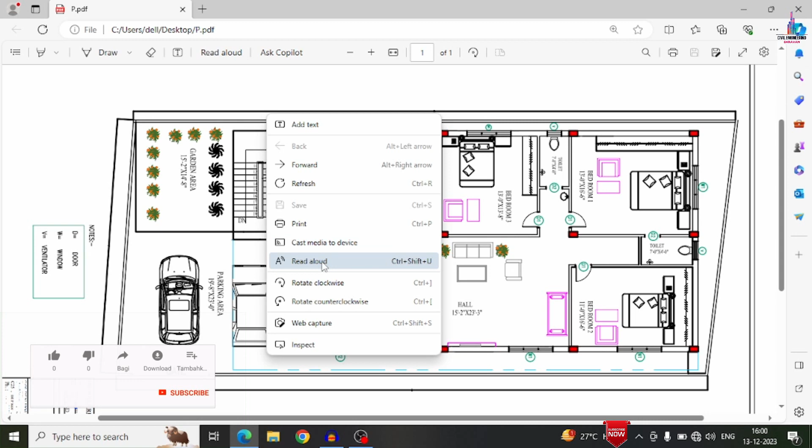This plan consists of the entrance from the north facing direction. In the north facing direction, there is a 15 feet common passage, which is nothing but the road. This is the east facing house plan. In the entrance section, there is a parking area with horizontal dimensions of 19 feet 8 inches and vertical distance of 23 feet 0 inches.

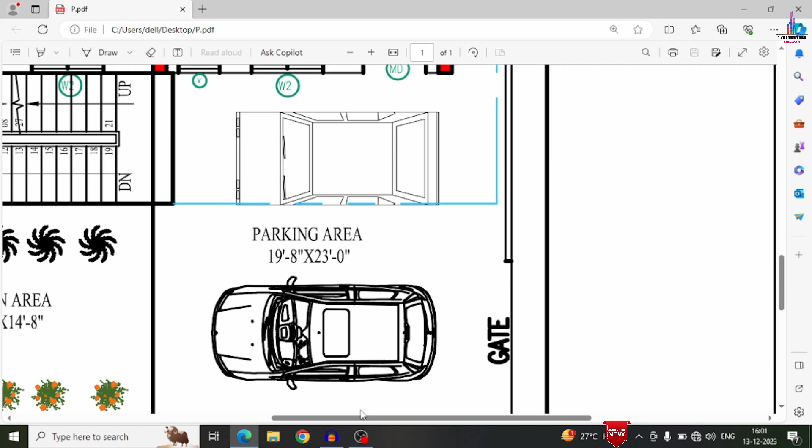Through this parking section, there is a garden area consisting of 15 feet 2 inches in horizontal direction and 14 feet 8 inches in vertical direction. This is the main guest room, placed in the east facing direction. This is the main door, through which we are entering into the guest room house.

This is the guest room dimensions. It consists of 11 feet 0 inches in horizontal facing direction and 14 feet 0 inches in vertical facing direction. Through the guest room section, we are entering here into the hall section.

This is the hall section. This is the puja section, which has horizontal dimensions of 4 feet 0 inches and vertical dimensions of 5 feet 0 inches.

This is the open kitchen area, which has approximate horizontal dimensions of 11 feet 3 inches and vertical dimensions of 9 feet 0 inches.

And this is the utility area, generally used for washing purposes. It consists of horizontal dimensions of 4 feet 0 inches and vertical dimensions of 9 feet 0 inches. So this is the utility area.

Now this is the dining area, which consists of 14 feet 0 inches in horizontal dimensions and 10 feet 7 inches in vertical direction distance.

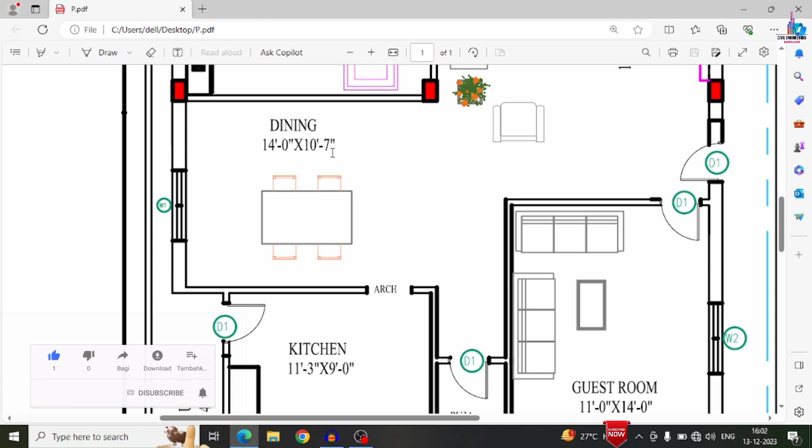Again, this is the hall, which consists of approximately 15 feet 2 inches horizontal dimensions and 23 feet 3 inches in vertical dimensions.

In the same process, there is the third bedroom, which has dimensions of 13 feet 0 inches in the horizontal direction and 13 feet 8 inches in vertical direction.

So this is the cupboard section, which is attached with one wash section, consisting of horizontal dimensions of 7 feet 0 inches and vertical dimensions of 4 feet 0 inches.

This is the master bedroom, which is nothing but bedroom number 1, consisting of higher dimensions compared to the other bedrooms, having horizontal dimensions of 13 feet 0 inches and vertical dimensions of 16 feet 6 inches. This is the door which is placed here.

It also consists of one attached washroom, which has horizontal dimensions of 4 feet 0 inches and vertical dimensions of 7 feet 0 inches.

And this is the secondary bedroom, which is nothing but the children's bedroom, having horizontal dimensions of approximately 11 feet 0 inches and vertical dimensions of approximately 16 feet 6 inches.

So this is the 3BHK plan, which is in the east facing direction. The staircases are provided in the east facing direction.

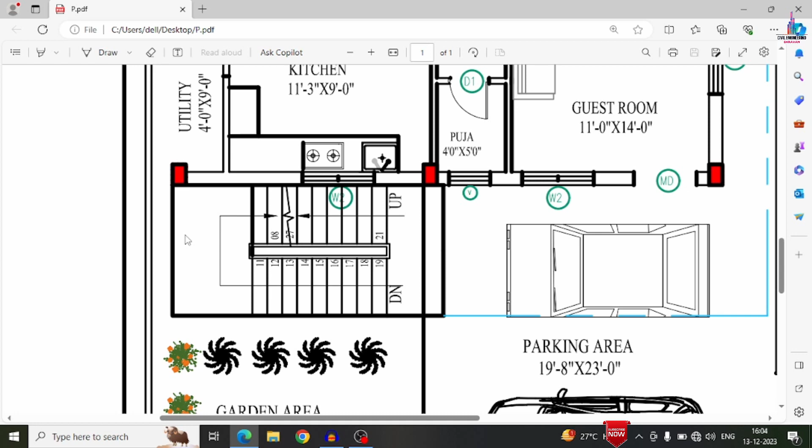For this plan, there are approximately 1, 2, 3, 4, 5, 6, 7, 8, 9, 10, 11, 12 columns that will exist here.

And for this plan, there are doors: MD is the main door, this is D2, this is the third door, this is the fourth door, this is the fifth door, this is the sixth door, and this is the seventh door, and this is the eighth door.

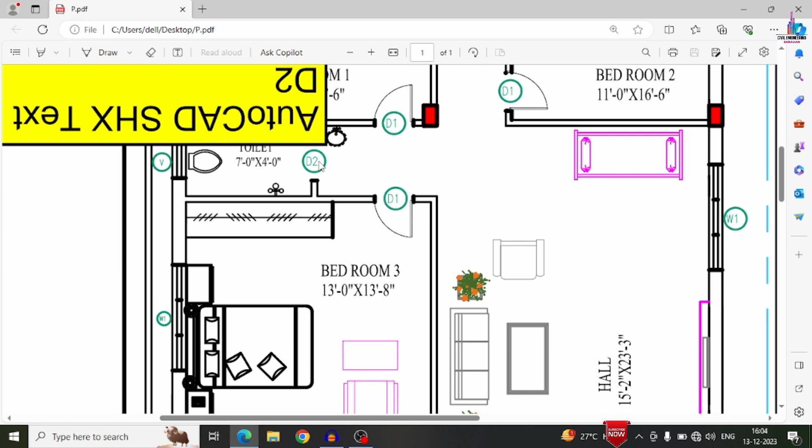So we have to keep in mind, we have to get even numbers of doors. Again, it will be consisting of the secondary doors like washroom doors, which have lesser dimensions compared to the other doors. This is the less dimensions door, and this is the less dimensions door.

Again, it will be consisting of ventilations, related to washroom 1 ventilation, and this is the washroom 2 ventilation. Again, we can provide some small ventilation here for the puja purpose.

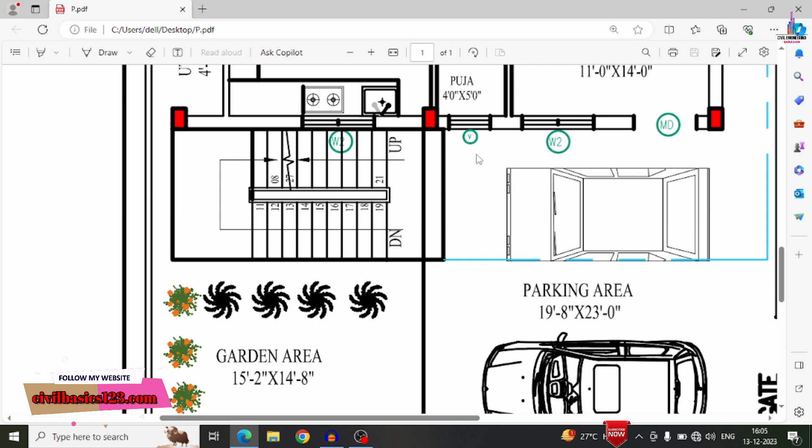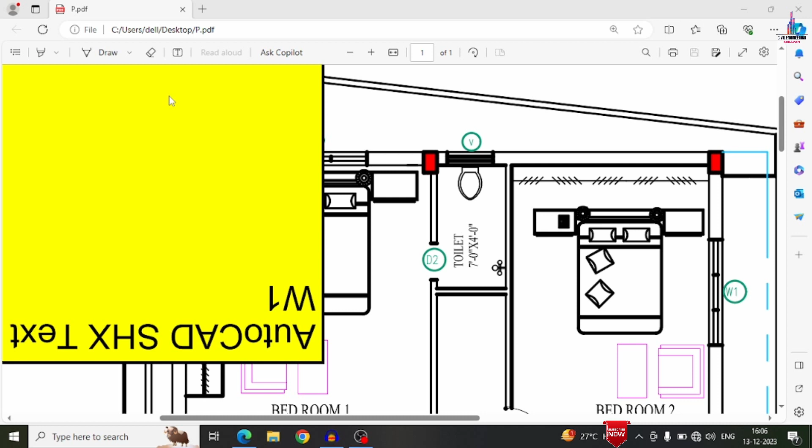Again, it will be consisting of windows as even numbers only. So window 1, first window here, this is the second window, the third window, the fourth window, the fifth window, the sixth window, and the seventh window for the master bedroom, and this is the eighth window for the children's bedroom.

So we have to keep in mind, before drawing any kind of building structural plan, we have to get an even number of columns, as well as an even number of windows, as well as an even number of doors.

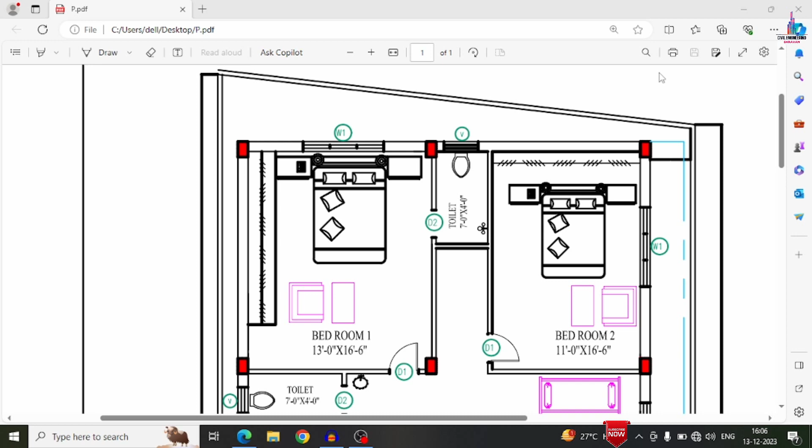So this is the typical floor plan placed in east facing direction, consisting of horizontal dimensions of the site of approximately 35 feet, and vertical dimensions of this particular site of 80 feet approximately. So this is the typical floor plan related to the east facing house plan.

Now I will show you the center to center distance between the columns for this particular floor plan. It will be consisting of 14 feet 0 inches in the A to B direction column, and B to C it will be consisting of approximately 16 feet 0 inches.

So totally it will be consisting of 12 number of columns, and in that it will be consisting of 3 number of grids which exist in the horizontal direction. Again in the vertical direction, it will be consisting of 4 number of grids.

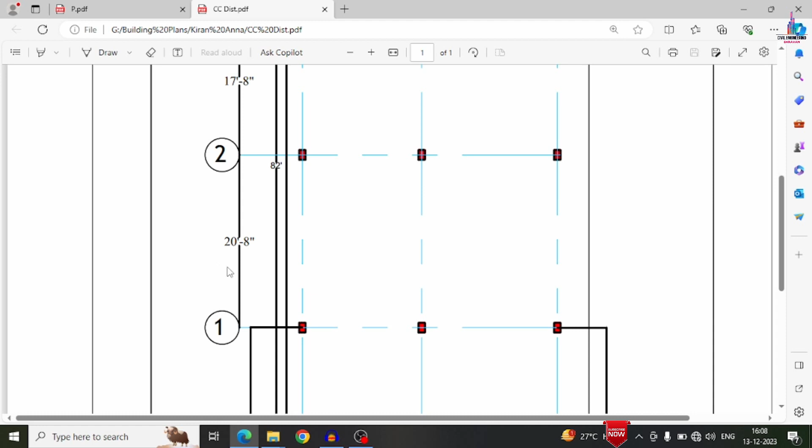So this is the horizontal distance between the first column and second column in horizontal direction, and this is 16 feet, the horizontal distance between the second column as well as the third column. Again in the same process, it will be consisting of 20 feet 8 inches in vertical direction for the first column and second column center to center distance.

Again, it will be consisting of 17 feet 8 inches in vertical direction for the second column as well as the third column in the vertical direction. In the same process, it will be consisting of 16 feet 5 inches in vertical direction center to center distance between the third column as well as the fourth column.

So all the columns are consisting of approximately 9 inches cross 16 inches as the dimensions for the column sections, and beams are approximately 12 inches as the depth of the beam, again we will consider, and 9 inches is the normal dimension we have to consider for the width of the beam.

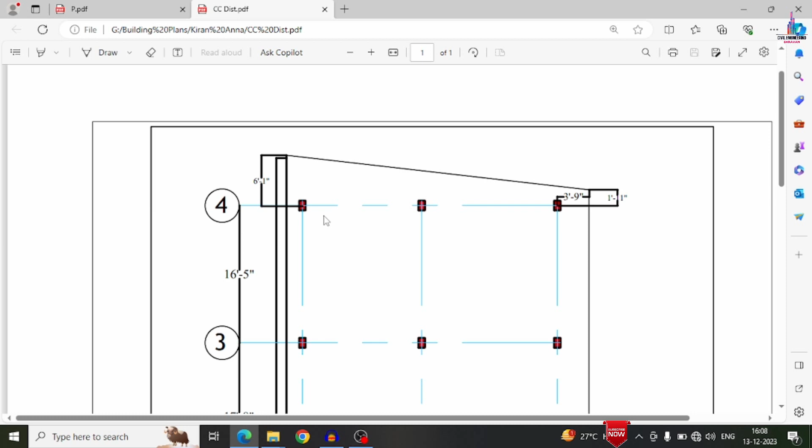So this is the complete details about the typical floor plan for the east facing house plan, which is consisting of the triple bedroom hall kitchen portion, 3 BHK portion. So as per the considerations of the client, we have drawn this plan according to the requirement given by the client. So this is a complete explanation regarding the 3 BHK house plan which is in east facing direction.